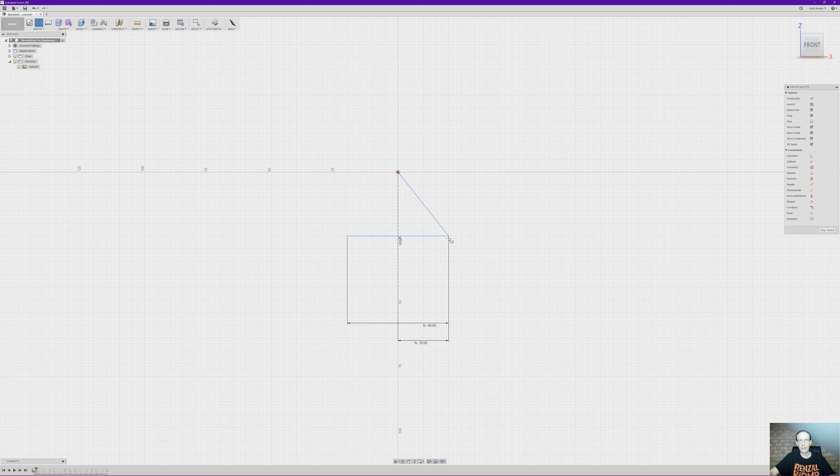With that said, let's get back into creating this. We'll create a line from this point up to the top point, another one from that point down to the bottom, and then we want to set our dimensions - this has to be parallel. If you find your dimension is going the wrong way, you need to make sure the dimension is parallel with the line itself, otherwise it's totally not going to work.

So the dimension for that bottom diagonal line is back cone radius 1, and for the top line it's cone radius 1.

Then we need to draw another little line just going from that outer point, staying perpendicular, so it's just like an extension of the back cone rad line. Then we want to create a point on the opposite side. These 2 points - the outer point is called the addendum and the inner point is called the dedendum - and using that we're going to dimension these.

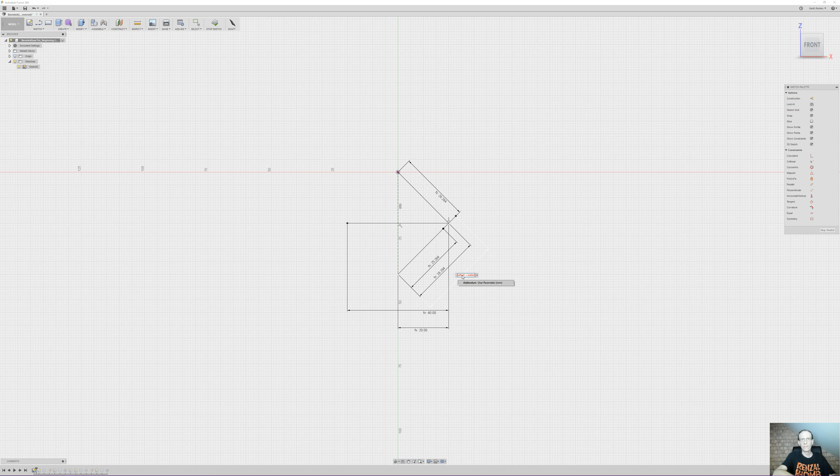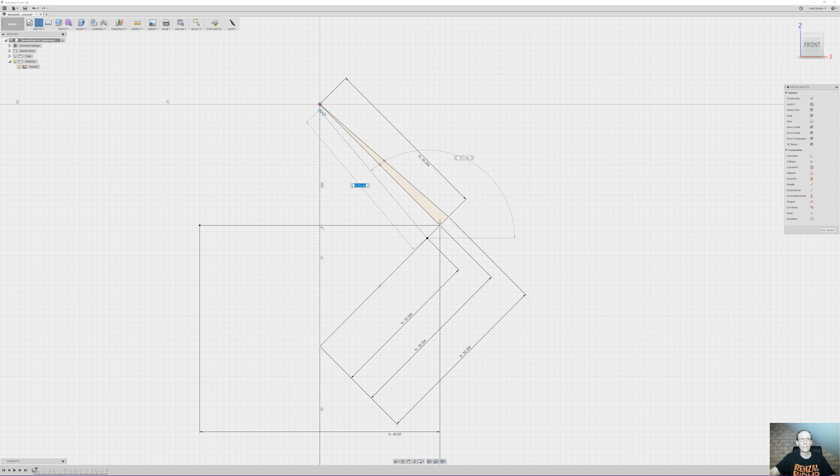Alright, so now that we've got those points dimensioned and placed, use our line tool again and create a line from the addendum point up to the origin, and same from the dedendum point to the origin, and then we'll create a line.

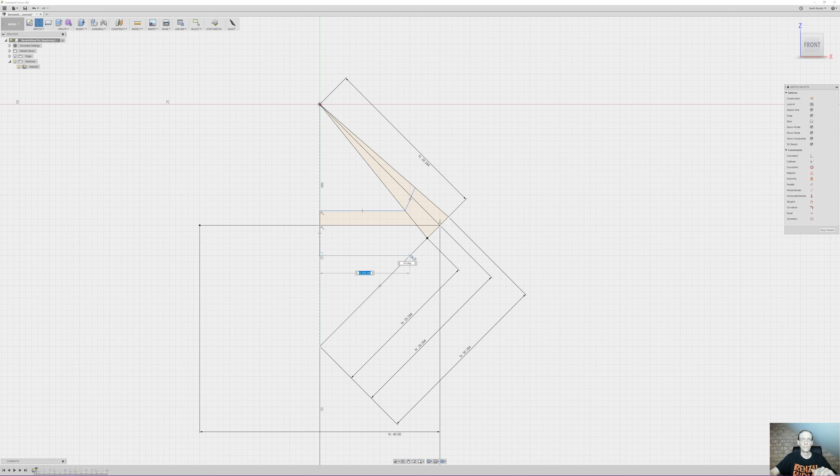You don't have to be specific or pedantic with this, you can kind of play around with the shapes, but you want a line that cuts from the two lines you just created, and then bring it across to the center line, then bring it down, and across. The most important thing is, with this baseline, you just have to make sure that it connects somewhere on this back cone radius line below that addendum point. As long as you do that, you should be a-okay.

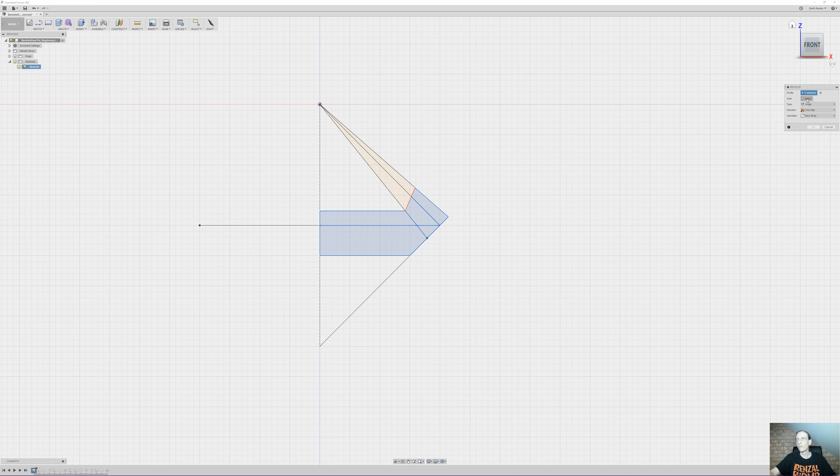So with that done, that's going to be the profile of our gear. So we select all of the parts of this, and we go create revolve. So we've got our profile selected. We'll just select the center line as the axis. Okay, and there's the body for our beveled gear.

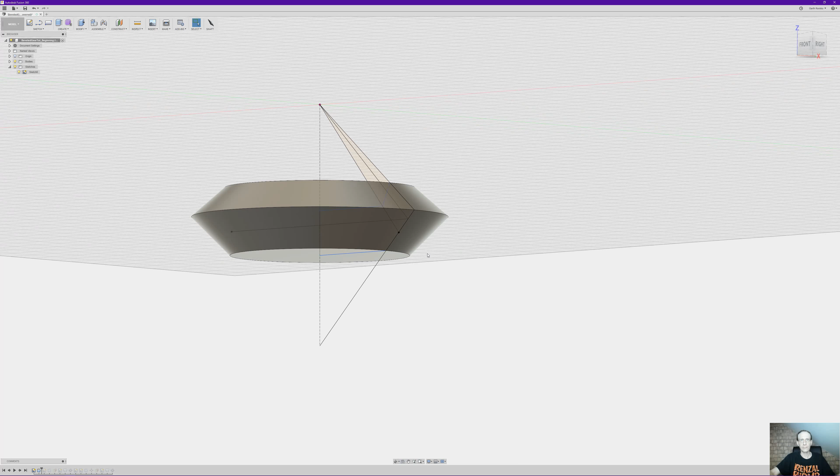So for the next part, we just want to unhide that sketch that we did, and we want to go to construct, plane tangent to face at point. The face we want to use is this lower face, and the point that we want to use is the addendum point. So click OK on that, select our sketch plane, create sketch, and I'll just rotate it slightly so we can see the base point.

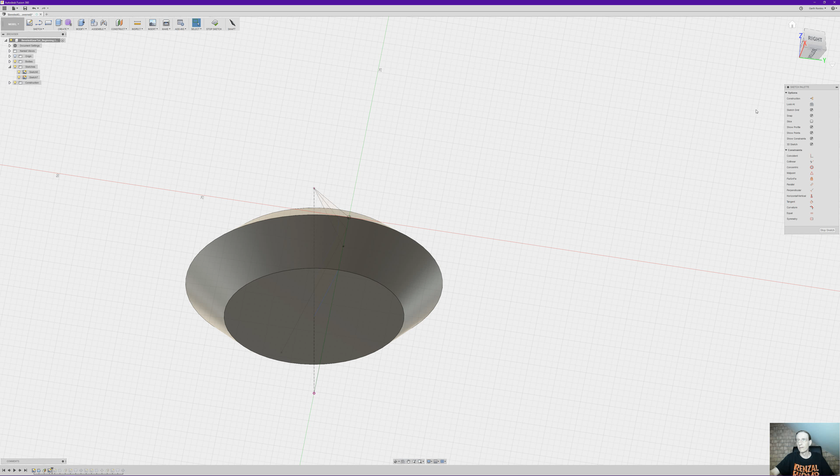Because what we want to do is project that base point so we can use it as the center point for our next part. And just to realign my sketch, I'm going to stop that and double click there. So just to tidy things up, hide that body.

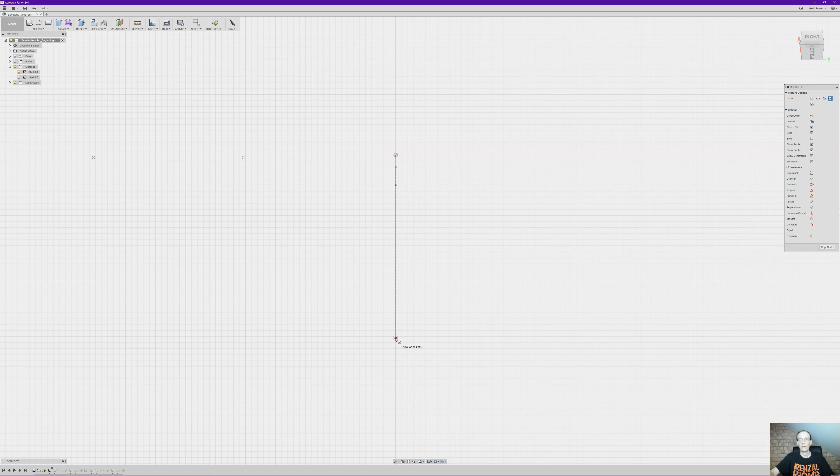And now we want to use our circle tool and create 3 circles using that projected point as the center. So circle 1, circle 2, circle 3.

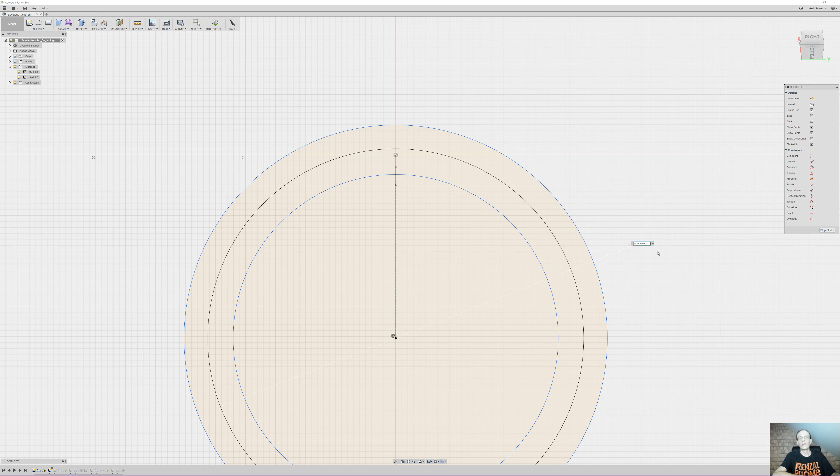Now we need to dimension those 3 circles. So D for dimension, and we want it to be back cone rad 1 multiplied by 2. Make sure that's multiplied. The reason we're multiplying it by 2 is because it's a diametrical dimension, whereas we're actually using back cone rad, which is the radius. So we just multiply that by 2.

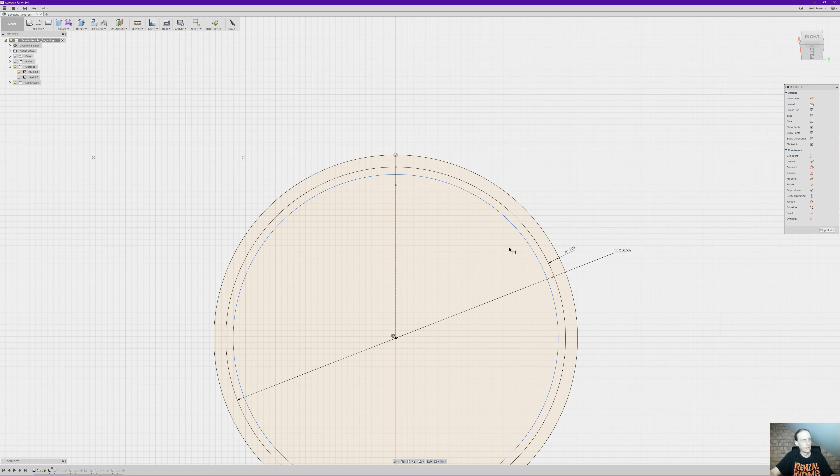And then we set another dimension from that center circle to the outer circle, and that one is equal to addendum. And one more dimension from the inner circle to the center circle, and that one is the dedendum.

Alright, so now that we've got those, what we want to do is create a construction line. This is just to make things a little bit easier, from the center up to about there on the addendum, and then stop construction line. And if we click on that point and hold the left mouse button down, you can create an arc outside of the circle, which, as you can see, it automatically makes tangent with that construction line.

And then we need to create another construction line that crosses through those 3 circles. And then what we want to do is create a point that is at the point where that arc coincides with the center circle. So we go point, place that there.

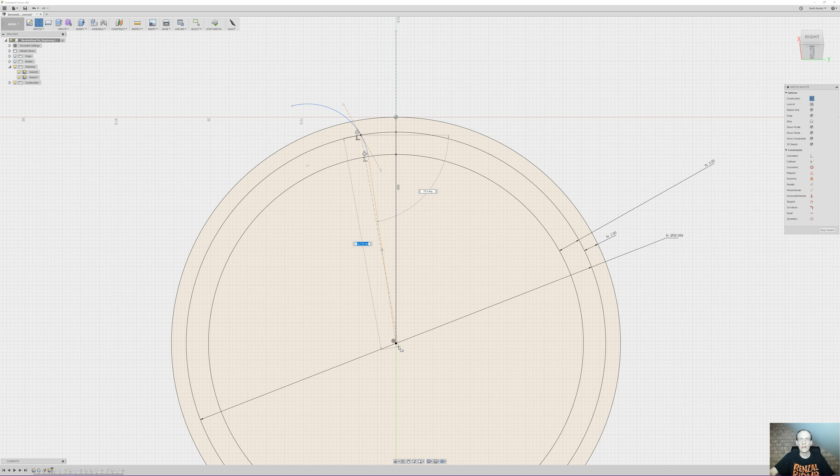Alright, so now we need to draw one more, well, actually I'll draw 2 more construction lines. First of which I'll just go from the center up to somewhere above there. Doesn't really matter how far because it's only a reference line. And the next one we want to draw from that coincident point back down to the center point. Just turn that off.

Alright, so now we'll set some dimensions, and we'll set the dimension between that construction line and our new reference construction line, and that's going to be equal to our pressure angle, which, as you saw earlier in the video, is 20 degrees, which you can see there.

And then what we want to do is set another dimension from the line that goes from the coincident point back to the center, to the center line. And this one is a bit trickier. It's going to be 360 divided by, and you want to put this bit in brackets, equivalent teeth 1, multiplied by 4, close bracket.

Okay, so that's got all that set. Now what we want to do is mirror this arc.

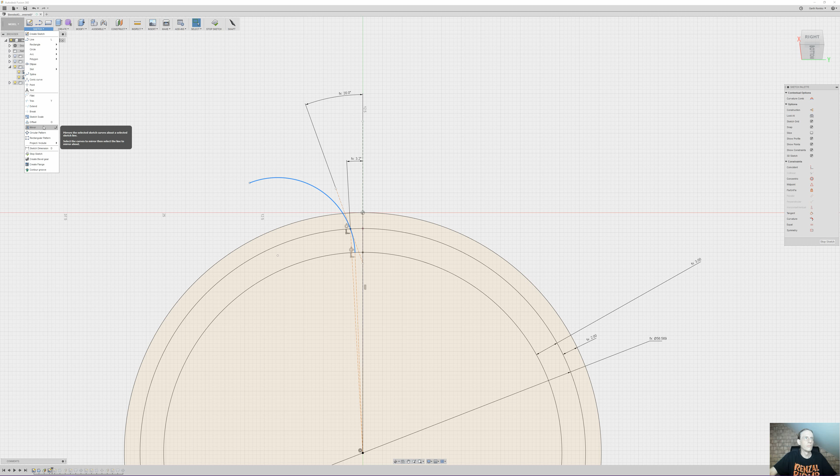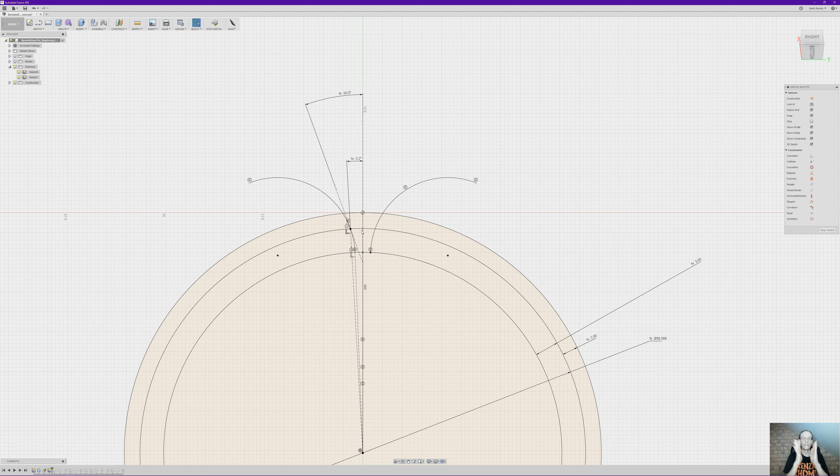Get rid of the dimension tool. We'll select the arc and go to mirror, and our mirror line is just going to be the center line. Hit OK. What you can see is we're actually creating the cutout for the gap between the teeth, so those curves will end up creating the teeth themselves after we pattern everything.

But before we get to that point, we need to create one more arc. This time it's going to be a center point arc, and we need to go from the center point out to just anywhere along that arc, as long as it's outside of those circles.

And that's gone the wrong way. Why did it do that? Let's try that again. I think I might have selected 3-point arc instead of center point. Yes, that's better.

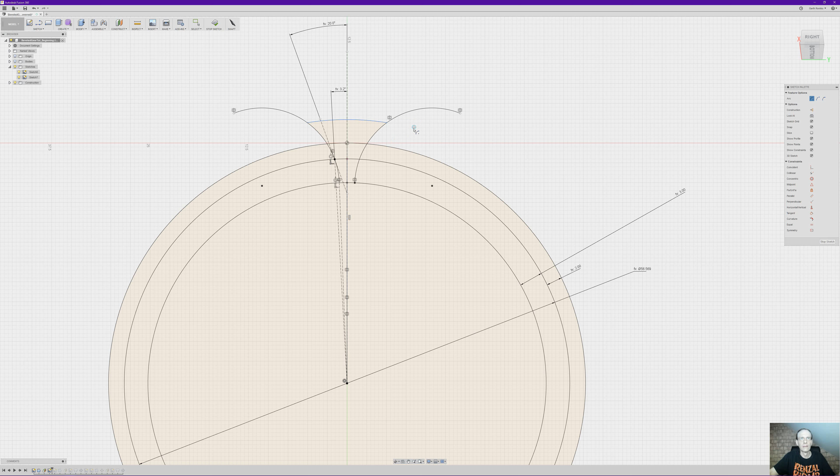So you end up with an arc between the two arcs. Deselect our tool, and we want to set a dimension between that new outer arc and the outside circle. I'm just going to set it at 0.5. The actual value of that dimension doesn't matter, as long as you have just a little extension around the outside of the circle, just to ensure that when we do the loft it goes all the way through the body.

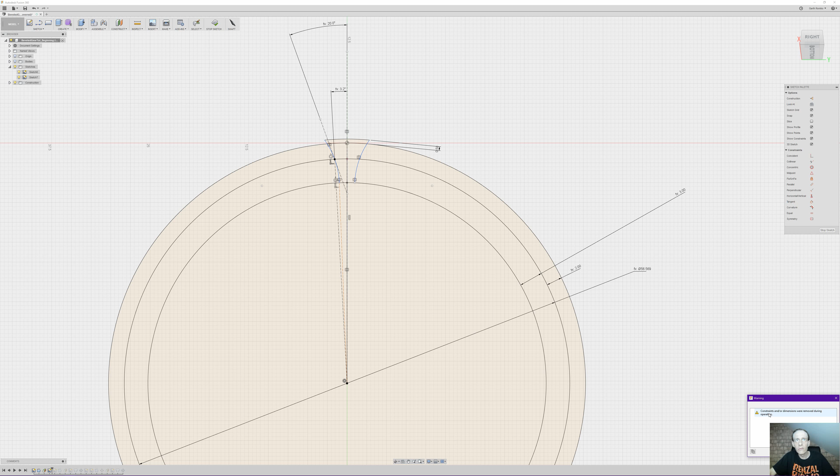So now that we've got that, we can just tidy things up, trim off the ends of those arcs. Why do we just get a warning? Constraints, all dimensions were removed. Really? I'm not sure which ones it thinks were removed.

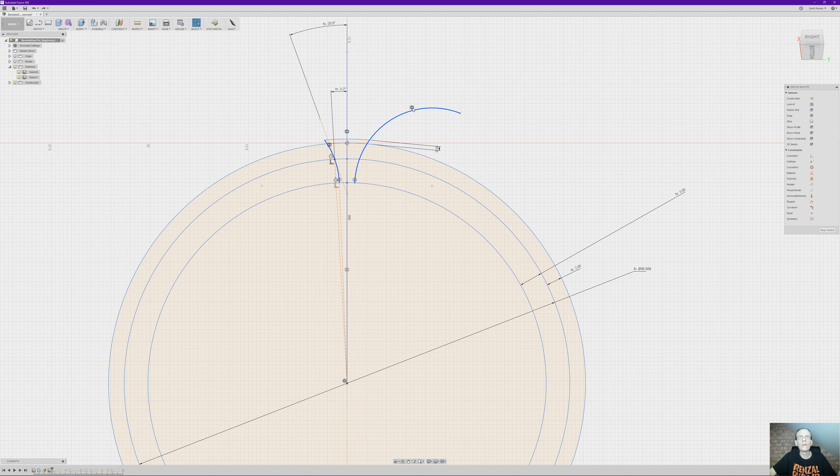Let me just undo that for a second. Oh, there's another constraint on there. How bizarre. Oh well, doesn't matter. They are actually the same, are they not? Yeah.

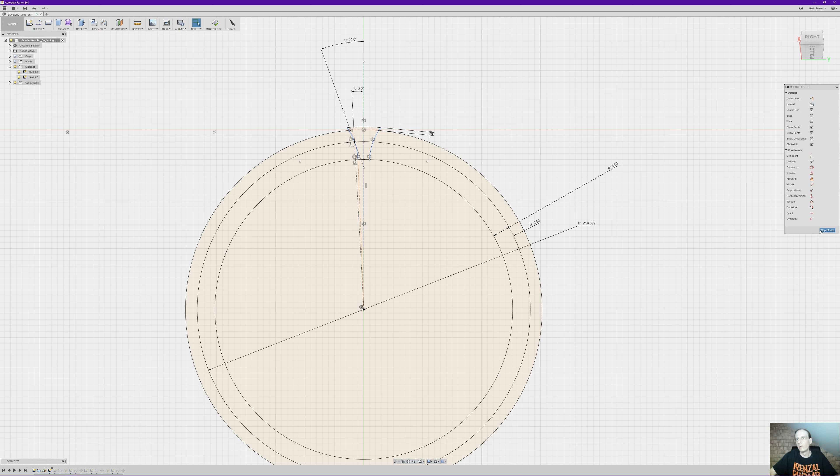Alright, so at this point we can stop the sketch, and we'll unhide our body so we can see what we're doing.

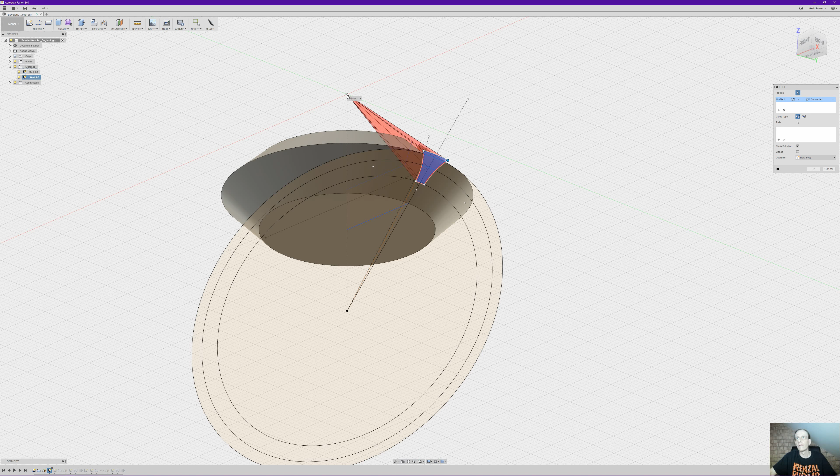What we want to do is create a loft, and I want to select those 3 new bits as a profile, and we'll rotate that up a bit, and I'm going to select center point as profile 2. As you can see, it automatically selects cut, which is what we want, and it cuts out a nice hole for our teeth.

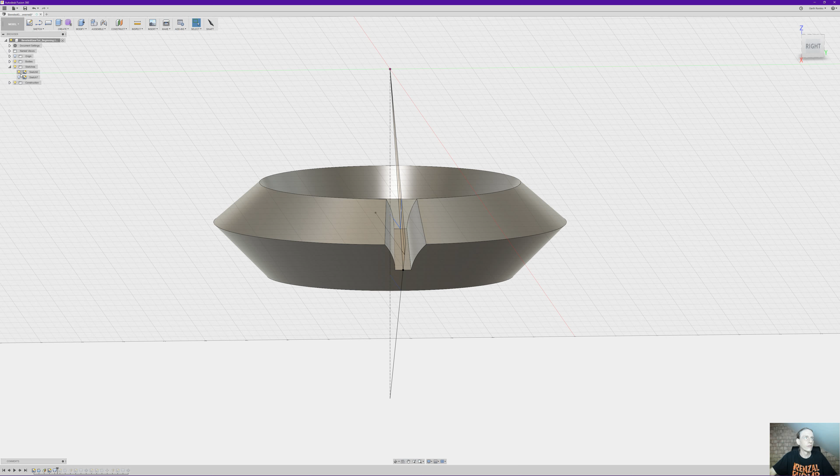So the next bit we want to do, just to make it a bit easier to see, hide the sketch, select those faces, and we go to create pattern, circular pattern. So we've got our objects selected and our axis. We can just use the center axis.

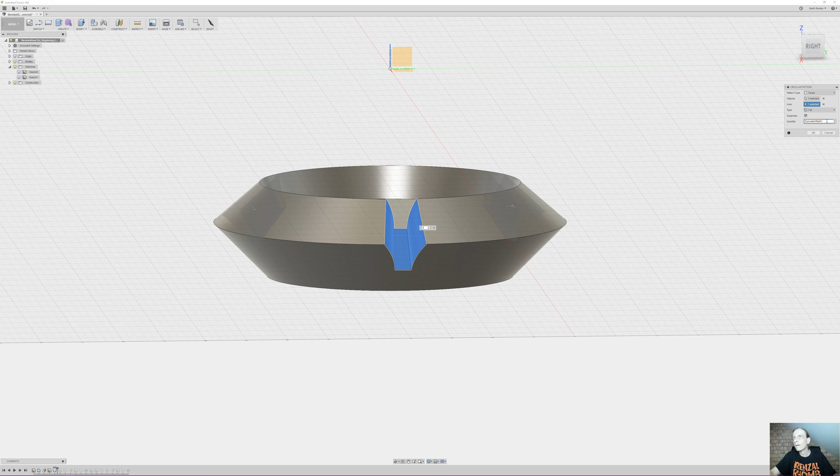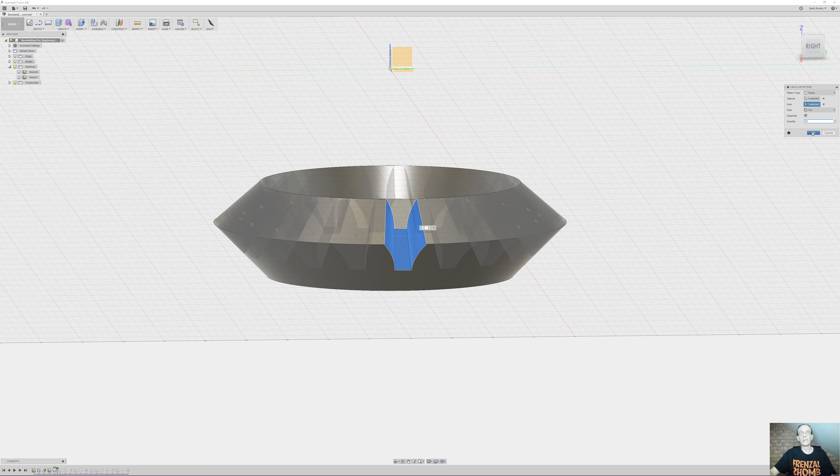I'm not sure if this is going to work. Try equivalent teeth 1. Doesn't appear to want to accept that. So we know how many teeth we want for the gear anyway, so we'll just type in 20. I don't know why it won't accept equivalent teeth 1 anymore, it used to accept it. In previous occasions when I've created these gears, it's accepted equivalent teeth as a quantity. For some reason it doesn't seem to now, but since we know the value of that, we can type it in manually, and as you can see, it's created a beveled gear.

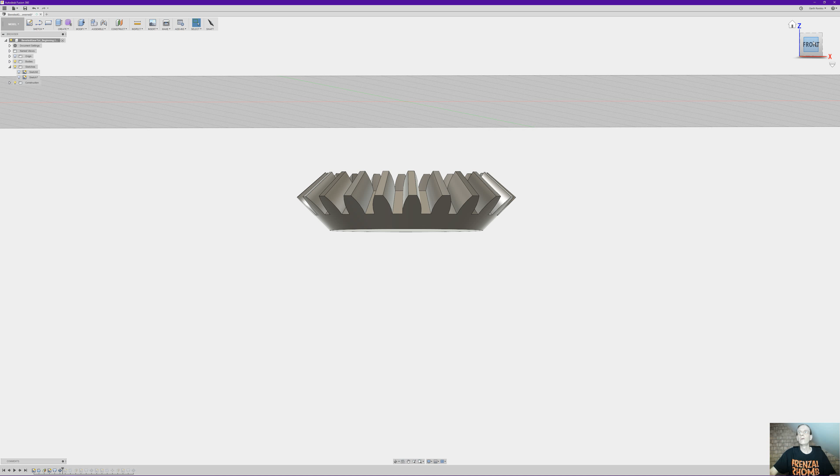So that's pretty much it. As I explained earlier in the video, from this point, to create your second gear, basically go back to your front plane and create a line horizontally across that way, a construction line, and then another one through that line, and then set your dimensions as pitch diameter 2 and pitch radius 2, and then do your lines joining the top and bottom, and back cone radius two, back cone radius two, and so forth. Basically repeating all the steps that I just did there, but at 90 degrees and with 2 instead of 1.

And that's pretty much it. It'll actually create the second gear in the correct position to mesh with the first gear, so it'll be in the right position, but generally the teeth won't be meshed when you actually create it. You'll find that the teeth kind of sit in line with each other, but because it's in the correct position, all you need to do is rotate it, like rotate one of the gears about 5 or 10 degrees, and they will be in the correct position.

So that's pretty much it. I hope you've enjoyed this tutorial.